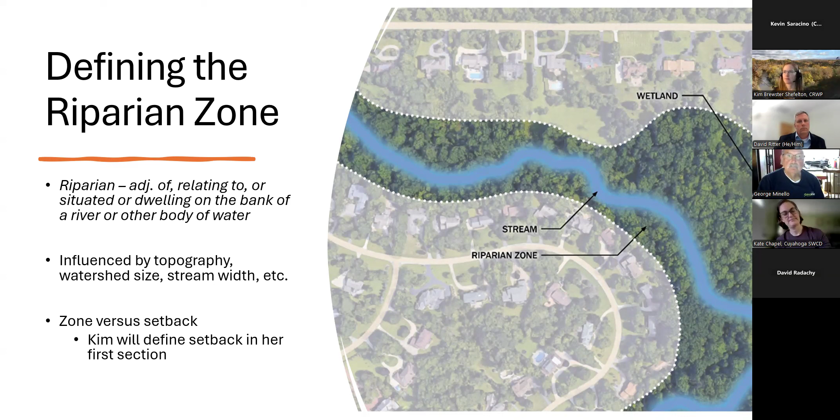All right, so other things that could be in this zone or other words we're going to be hearing. I often, when I'm working with the public, will hear folks use the terms floodplain, watershed, wetland, et cetera, sort of interchangeably. And while a lot of those things are included in the riparian zone, they're not necessarily one and the same. So if the riparian zone has wetlands nearby that are contiguous with the zone, that usually gets added to that outline, along with 100-year flood risk sorts of things and other things as well.

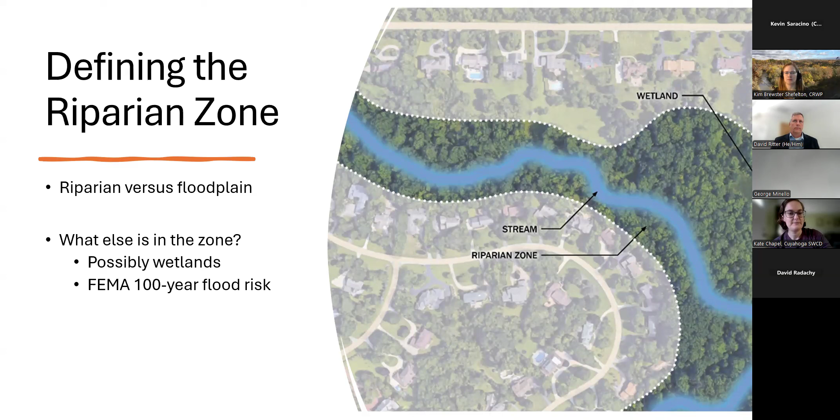This is not a static place. And so the stream, the river is going to move. It's going to move either into infrastructure or not, and the riparian zone is going to move with it. So in that way, I've seen, at least in the codes around Cuyahoga County that I'm familiar with, there's often a reference to the Soil and Water District as a resource to help folks determine where this zone is or

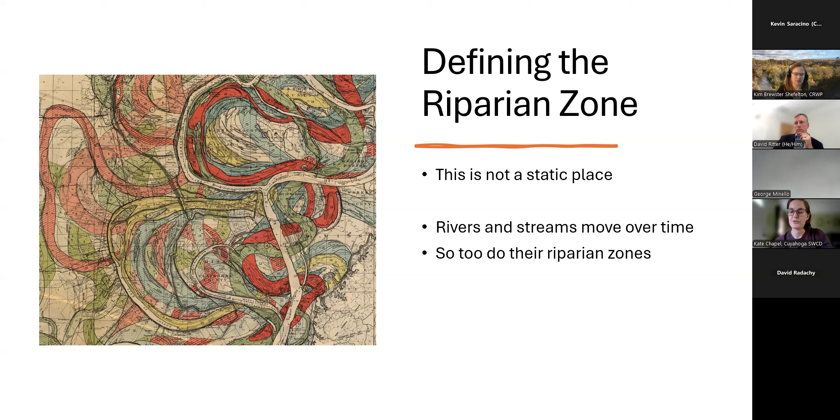where the setback is. And a lot of that I encourage you to do, even if you have a riparian setback map or a riparian zone map, because those things may have changed over time. And it's always a good idea to ground truth some of those things as you're in the process of development or working around the stream. All right, next slide.

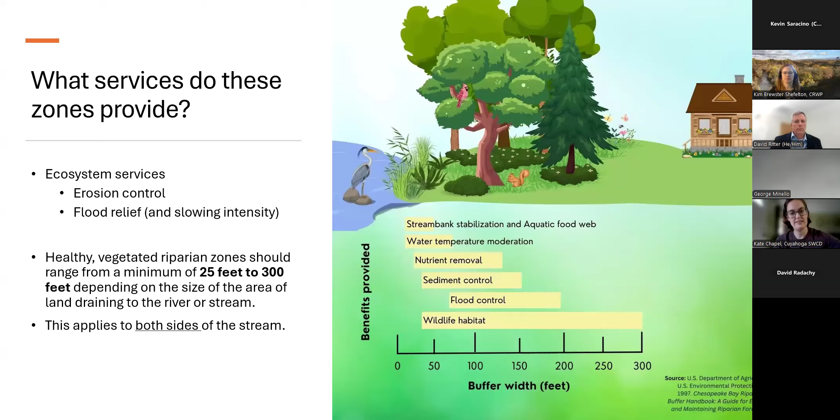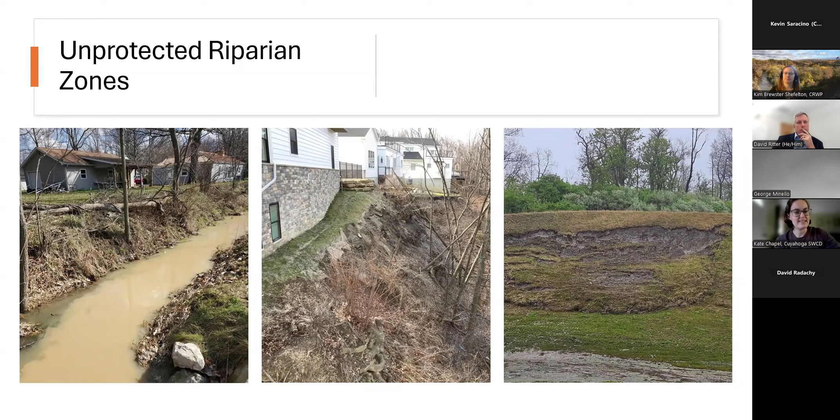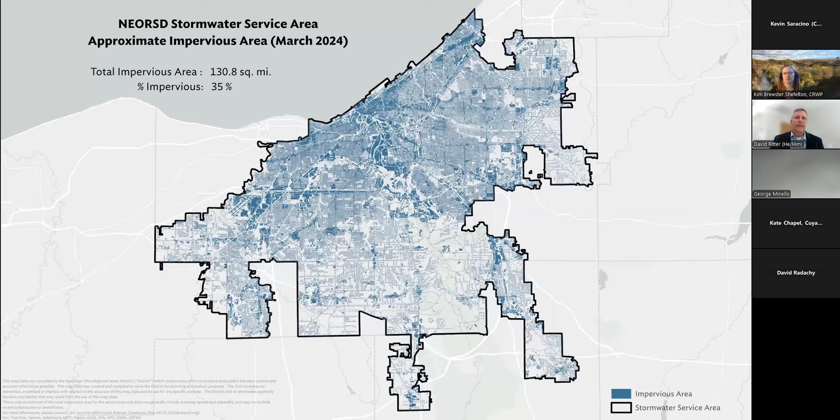It also leads to maintenance issues because there's a lack of access to these channels because of private development. It makes it very hard to go in and do any sort of repairs just because there's so many encroachments along the stream. And also that natural stream migration is arrested in a lot of places by hard armoring, just because they're trying to protect those assets along the stream channel. So the preservation of riparian areas and those ecosystem services allows the stream to adjust and move without impacting assets. Next slide, please.

So I did a quick Google search to look at some studies to kind of determine what the economic benefits are related to the conservation of natural riparian areas. The one study, the economic value of riparian buffers in the Delaware, determined that buffers provide over $10,000 per acre per year in ecosystem and other related community benefits. The study also stated that in the Puget Sound watershed, restoration projects cost at least 10 times more than the conservation of that area or the conservation projects within that watershed.

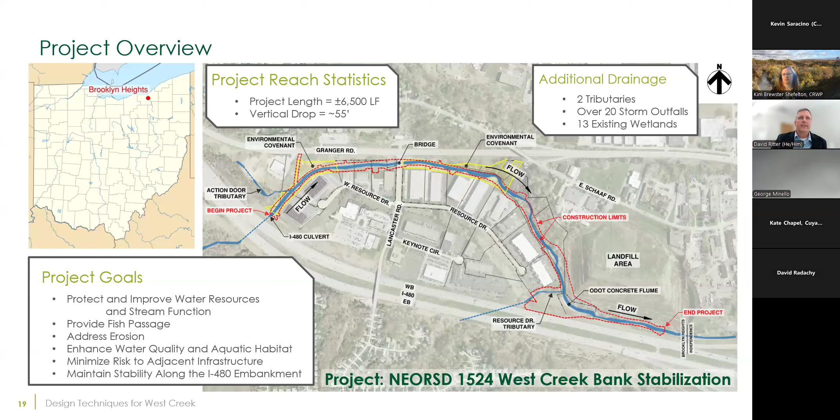The project goals include trying to bring back some of those lost ecosystem services into the project reach and also to protect the adjacent infrastructure. Next slide. Next slide, please.

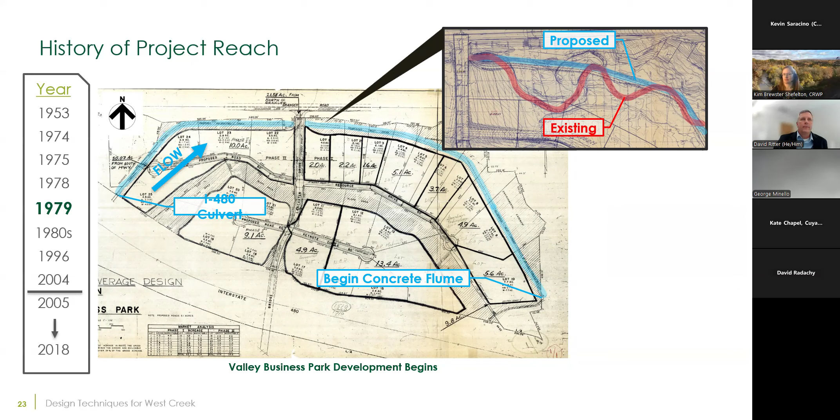By the late 80s, the conversion of the natural channel to more of a conveyance channel was complete. So Granger Road was constructed on the north side of the valley and kind of encroached those valley walls. I-480 was constructed to the south. West Creek was straightened and culverted to get underneath I-480 and also to make the right angle bend there at the downstream end of the project.

A flume was constructed. Lancaster Road was built across West Creek to serve a subdivision south of I-480 there. And the business park was nearing completion in the late 80s. And that was really kind of the nail in the coffin for this section of West Creek as it pushed that stream right up against that North Valley Wall. And also there's a little landfill there to the east end of our project, which also further constricted that stream channel. Next slide.

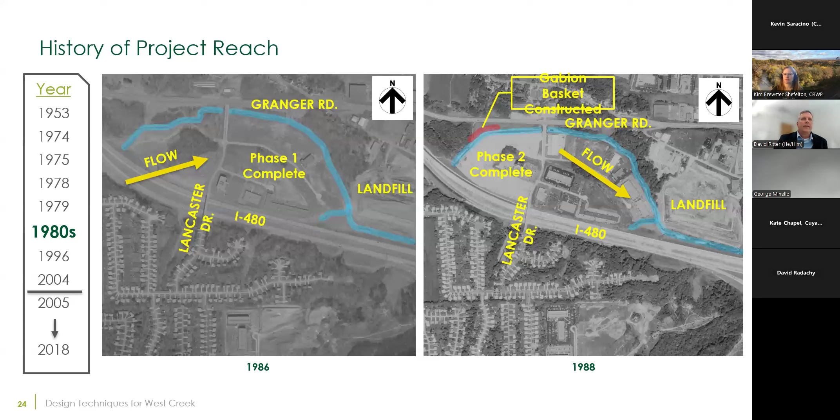So by constricting and straightening the channel, severe erosion began soon after the relocation as the stream attempted to adjust to the new flow conditions. In addition, upstream development was occurring and unmitigated stormwater flow coming from the new development led to more volume and higher velocities within the channel. And the combined effect was an unraveling of the bed and banks of West Creek through the project reach.

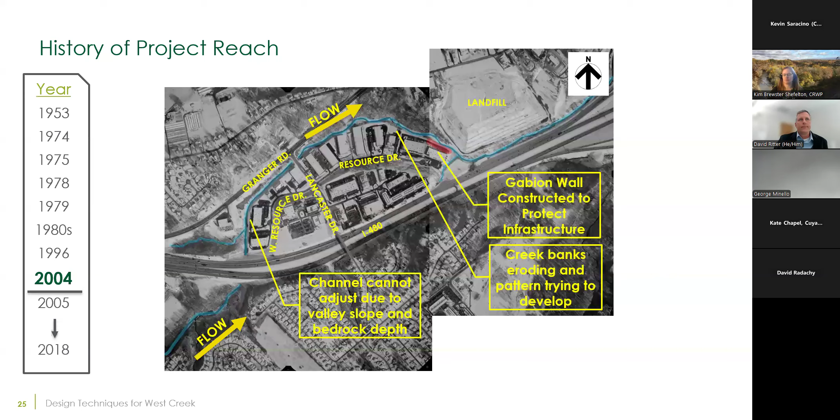During the 2000s, there were repeated attempts to stabilize the stream, but limited funding and extreme flow conditions ultimately led to the failure of some of those restoration practices, which brings us to our most recent project. Next slide. Next slide, please.

So the following photos show evidence of downcutting and lateral erosion that threatens infrastructure and washed away in-stream habitat, making it difficult for fish migration. District studies showed a 50% reduction in the number of species above the project reach as compared to below the project. Next slide.

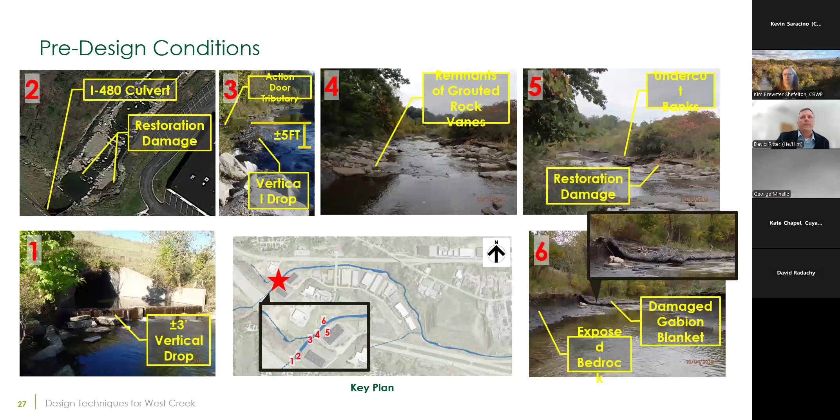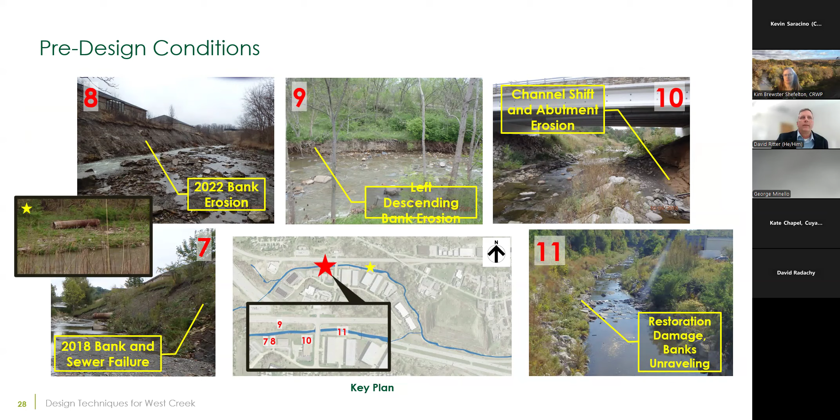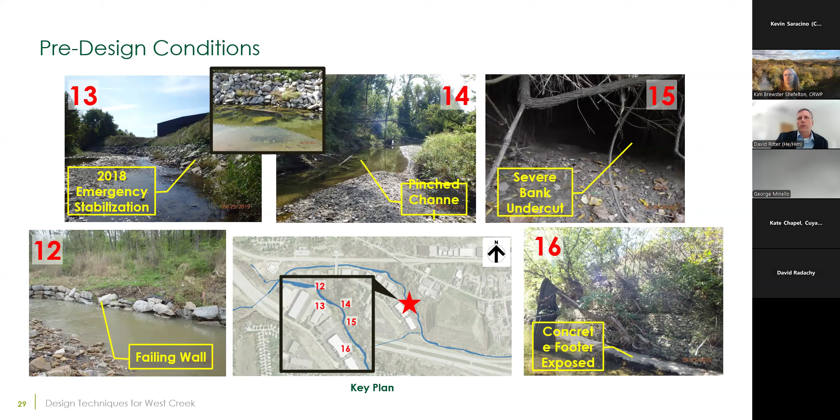Stormwater outfalls and general bank failures occurred, again, due to this bank erosion as that stream channel is trying to adjust to its new flow regime. Next slide. Emergency projects were needed to protect infrastructure, and the previously installed erosion control practices were beginning to fail as well. So again, this channel is just showing more and more signs of unraveling. Next slide.

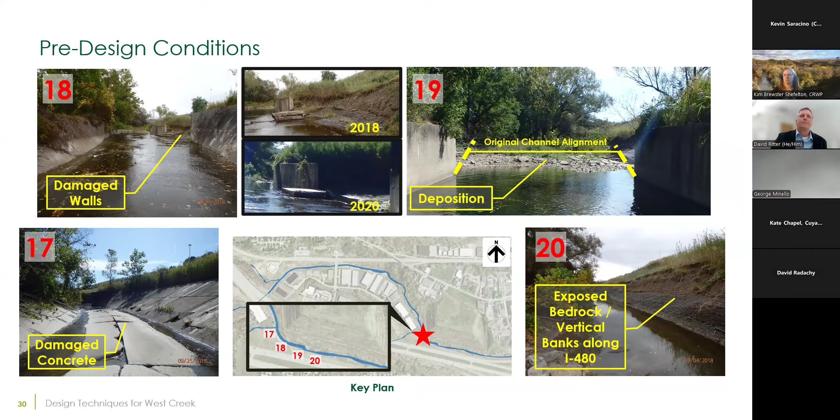These are some photos of the ODOT flume, which protects the I-480 embankment and had reached the end of its useful life and was also failing. So again, this shows a stream system that's out of equilibrium and continuing to try to adjust to its new conditions after 30 years of channel modifications and encroachments. Next slide. All right, we'll jump to the next slide, please.

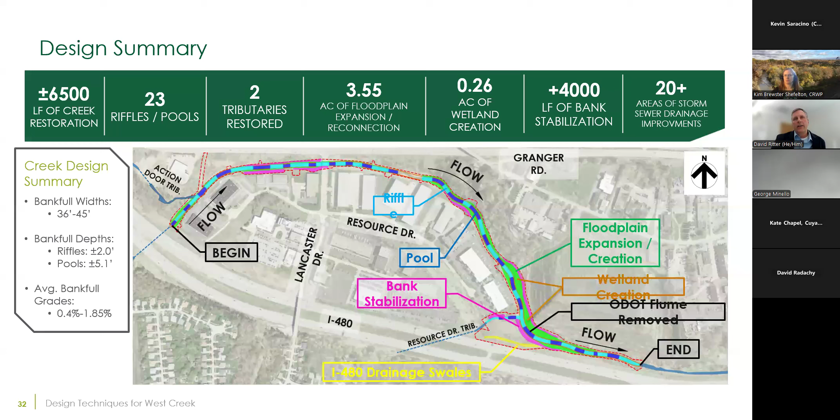So the current district project utilized a raised grade approach by filling in the channel and bringing that channel bottom up between 1 and 6 feet, allowing for fish passage and widening of the flood prone width to attempt to reduce velocities through this section of West Creek. And while the flood prone area was expanded during the project, there just isn't enough room to make a substantial difference during large events, and the reach has to be resistive to the 100-year flow volumes and velocities since it's so constrained within that new channel. Next slide.

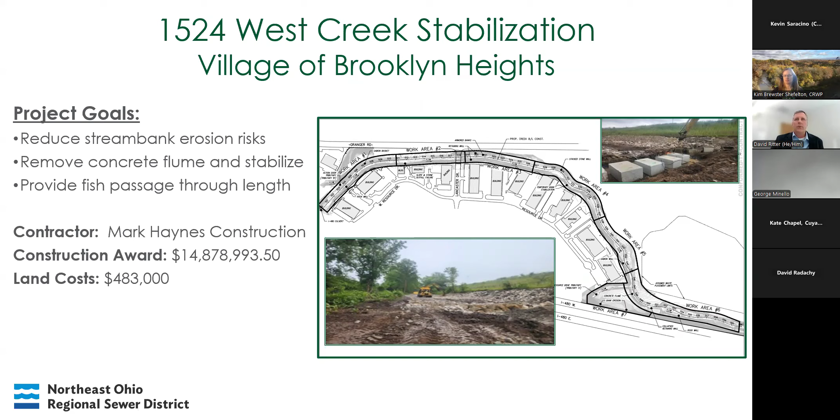While the final figures are still being calculated, the project design costs were about $2 million. Land acquisition costs for easements were around $500,000, and the construction costs will be around $14 million by the time this project is done. So there's definitely some economic impacts going back into a reach like this and trying to restore that section and provide stabilization and erosion control. Next slide.

So if we flip back to the earlier slide, I wanted to run some numbers on this project just to get a sense of the overall cost to the Northeast Ohio community. Next slide, please.

First, I took a look at conservation versus restoration. Thinking back to the Puget Sound study, which found restoration costs were at least 10 times the amount that conservation projects cost. I went back in time to look at land values of a similar piece of property, a floodplain along the Cuyahoga, and what it would have taken to preserve the corridor.

The oldest valuation in the auditor's database was from 1996, but even using those numbers, I calculated 45 acres of riparian area. So that was the length of the project times a 300-foot width buffer. To preserve that in 1996 dollars would have been about $600,000. So using the current project cost, the restoration was close to 26 times the cost of conservation. And again, without fully realizing all of the lost ecosystem services.

Next, I used the Delaware River study value of $10,000 per acre per year of lost ecosystem services. And using 1975 as a starting point, when the stream first began to be impacted, the region experienced over $22 million in lost services based on the Delaware study. Next slide, please.

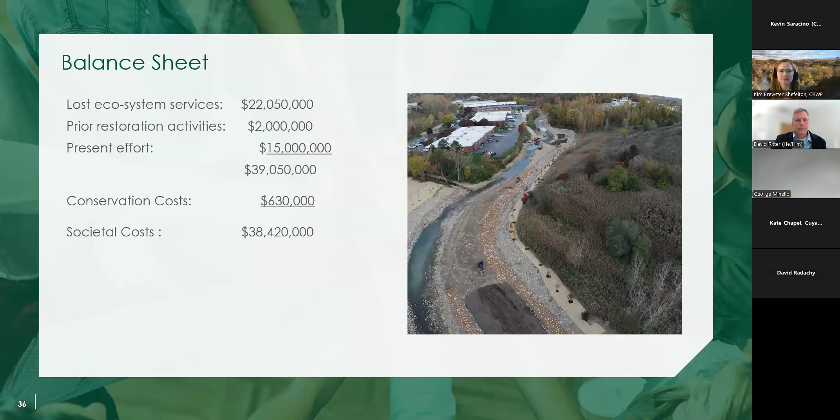My name is Kim Brewster Shefelton. I work with Chagrin River Watershed Partners, and I'm just going to give a high-level overview of riparian and wetland setbacks and how they work. Again, most of the communities represented here today already have setbacks on the books, so this is just a refresher on what these are, how they generally work for communities across Ohio.

And taking another quick step back into zoning itself, as many of us know, zoning is the way a local government controls the physical development of land and the uses of property. Zoning is designed to protect the welfare of a community by allowing desired development in appropriate locations and prohibiting undesirable development in other locations. Zoning is really a way for a community to implement its comprehensive plan.

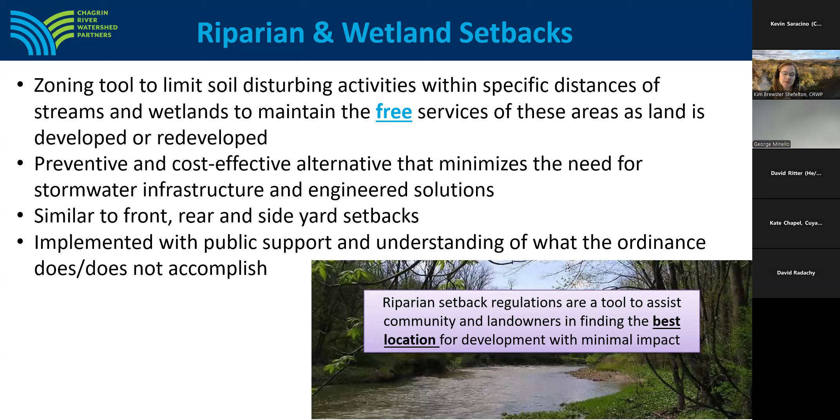So riparian setbacks are a zoning tool that communities can use that help maintain those free riparian functions that Kate and Dave described as communities are growing and as land is developed or redeveloped. So riparian setbacks control the location of soil disturbing activities within the riparian zone, and they're really similar to front and side yard setbacks that can be flexed with other setbacks to allow the riparian setback to be maintained without making lots unbuildable. Riparian setbacks are not intended to prevent development, but really to find the best location for development on a particular property.

So Chagrin River Watershed Partners has developed a model riparian setback code that can be tailored and adopted by communities that wish to maintain those free benefits that are provided by healthy riparian areas. Our model code does establish a minimum setback width that controls the location of soil disturbance on a parcel. The minimum setback widths in our model code range from 25 to 300 feet on both sides of a watercourse, depending on the watercourse drainage area. Our model code also extends the setback to include wetlands and the FEMA designated 100-year floodplain.

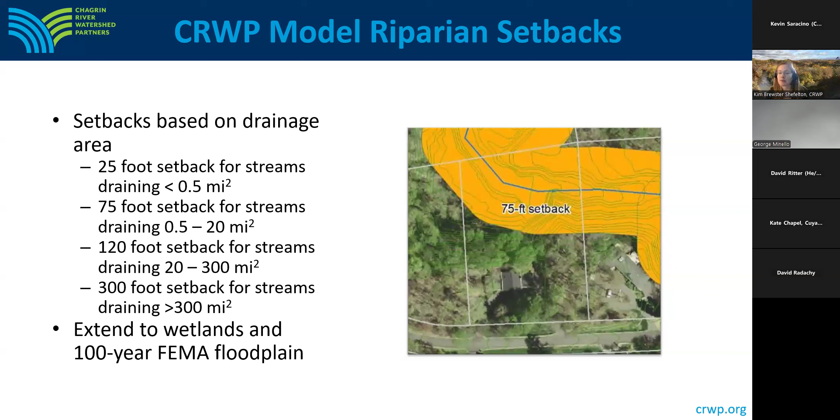So specific setback requirements really vary by community, so your community's requirements might look different. Pamela Davis of NOACA is going to be discussing variations in code requirements across communities in the Northeast Ohio region a little bit later.

In addition to riparian wetlands, isolated wetlands also provide a lot of benefits for stormwater management. So we also have a model wetland setback code, which requires areas around wetlands to be preserved in their natural state. The wetland category is determined by Ohio EPA's wetland quality assessment methods, with Category 2 wetlands being your moderate quality wetlands, and Category 3 wetlands being your highest quality wetlands, having different setback widths.

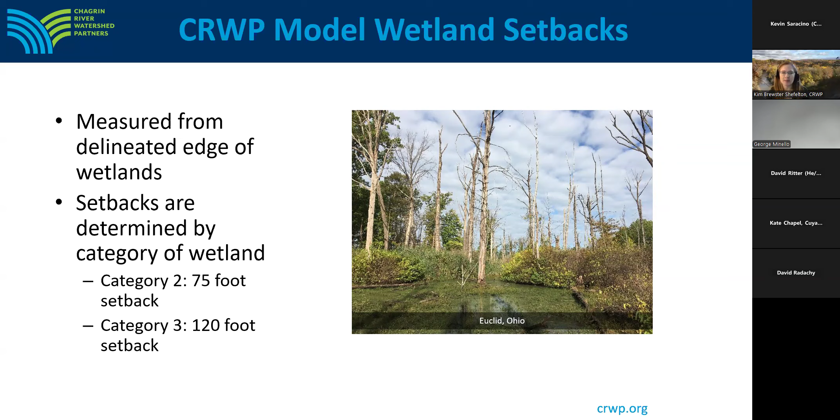If you're interested in taking a deep dive into how we developed our model code widths, you can check out a document on our website. There's a link there to point you to that to take a little deeper dive into that.

So in terms of determining the presence and extent of setbacks in the field, again, the setback requirements vary by community. In CRWP's model code for small streams that drain less than half a square mile, setbacks apply when there is a defined bed and bank. So defined stream bed, that's typically an area that's free of vegetation due to flowing water. It's defined by rock and sediments of varying sizes, all the way from big boulders to small particles like sand and silt.

And setbacks in our model code are measured outward from the ordinary high water mark. That's the point of the bank or shore where the presence and action of surface water is so continuous that it leaves a district that's marked by erosion, destruction or prevention of woody terrestrial vegetation, predominance of aquatic vegetation, or other easily recognized characteristics. And so that ordinary high water mark really defines the bed of the water course.

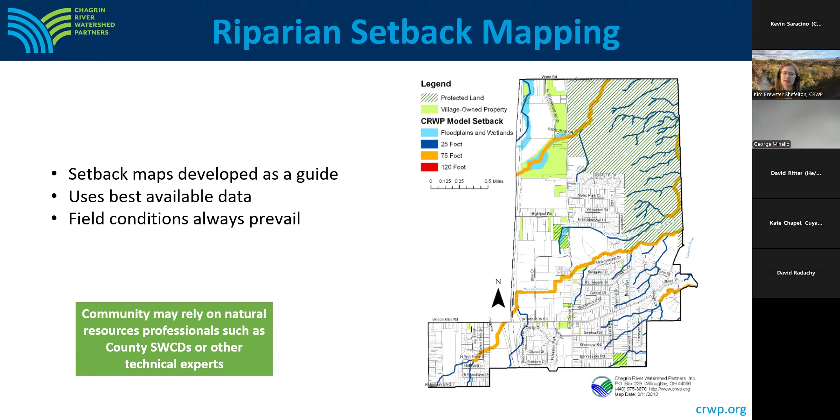Typically, developers are required to delineate setback widths and water bodies when they're submitting their development plans to a community. It is not the responsibility of the community to delineate setbacks for every property when adopting a riparian setback code. And communities can really rely on other natural resource professionals that are available to them, such as your county soil and water conservation districts, local watershed organizations, or other types of technical experts.

So in terms of permitted and prohibited uses, CRWP's model riparian setback ordinance describes permitted uses within the riparian setback, also conditional uses or activities that are allowed with a permit, and then also activities that are prohibited in the setback area unless a variance is granted. So your community's code may vary from this list. I'm just showing this list as an example.

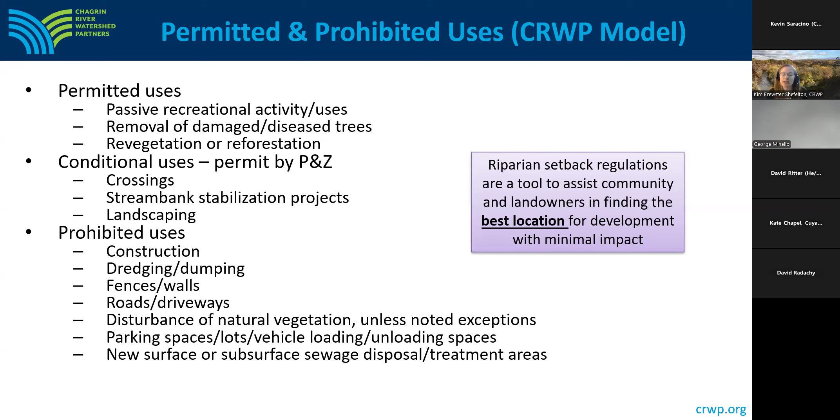So typically, prohibited uses would be subject to the zoning process, meaning that if someone has a project where a prohibited use is proposed in the riparian setback area, they'll be able to come into the Planning and Zoning Commission or the BZA to discuss their request, ask for a variance, and look at other potential options. Again, the goal would be to identify the best possible project with minimum impact to that riparian area.

In most communities' codes, structures that are already located within the setback at the time of adoption of that code are grandfathered in. So typically those structures can be maintained or repaired, but should not be changed or enlarged. And the community's existing regulations regarding non-conforming structures and variances apply. So I encourage you to refer to that section of your code.

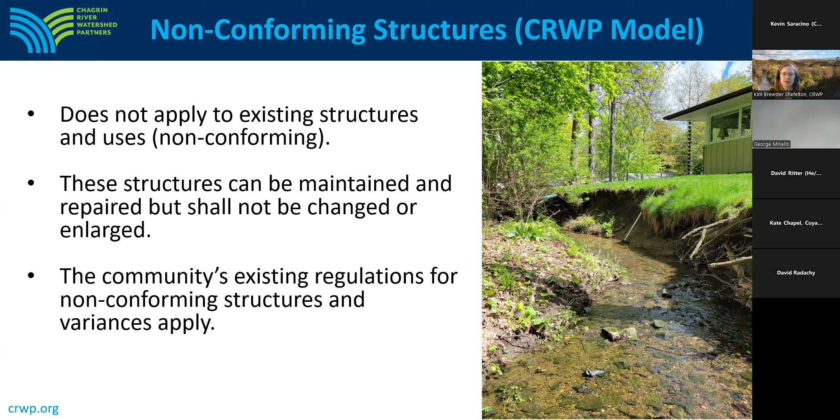We've had this question come up, so I added it here. Do non-conforming structures remain non-conforming if the property changes ownership? Thought that was an interesting question. It is our understanding that non-conforming structures do not lose that status due to change in property ownership alone, but again, refer to your individual community regulations about non-conforming structures and variances.

So what is the purpose of the variance as a zoning tool? We're going to revisit this in our second hour of our workshop in terms of how to handle variance requests, but just in terms of an overview here, variances or exceptions for prohibited uses within the setback may be granted by the community if they decide that the application of the zoning regulation would result in a practical difficulty or an unnecessary hardship due to the unique characteristics of the property that differentiate it from other properties in that zoning district.

So zoning codes, they're an excellent and cost-effective tool for protecting healthy riparian zones and all the free services that they provide to a community. However, they are imperfect tools, and no zoning code can anticipate all future development circumstances.

So variances are really essential to the proper functioning and administration of a zoning code. There are two different types of variances that relate to riparian and wetland setbacks. The use variance being exceptions for the use of a property that is not normally permitted in a specific zoning district. For use variances, you must demonstrate that denial of that variance would result in unnecessary hardship that is not self-imposed by that landowner or the applicant. And these are usually pretty rare variances, and they may not be allowed in all communities and all community types. So just something to note there.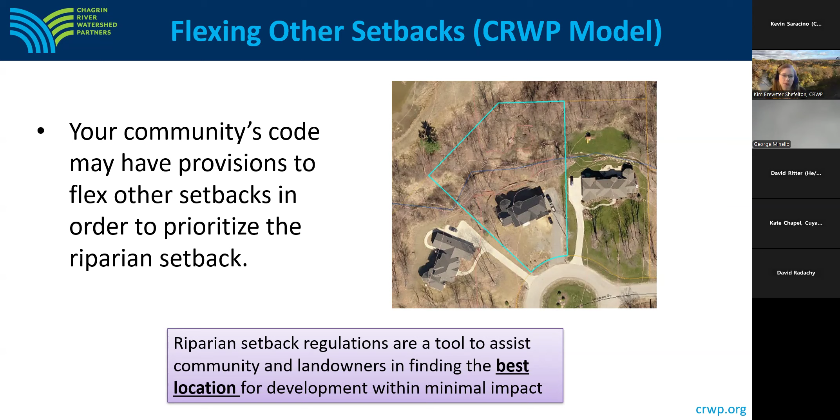So in terms of flexing other setbacks, our model has provisions for providing variances to other setbacks, such as side yard, front, rear setbacks, and so forth, to really make sure that lots can remain buildable while also maintaining the riparian setback. Again, the idea here would not be to prevent development, but to find the best location for development on that property. So the photo here is depicting a property in a community with riparian setbacks where a variance was granted to reduce the front yard setback from 100 feet to 70 feet in order to maintain the riparian setback in the rear of the property. So that's an example of other setbacks being flexed to really uphold that full riparian setback width.

So riparian setbacks are an important local zoning tool because they help maintain the free services of riparian areas that we discussed earlier. They also lower costs to residents and communities by keeping homes and infrastructure and other property out of the path of ever-changing streams without decreasing property values too. Riparian setbacks are also a best management practice recommended by Ohio EPA and other agencies. And then finally, protection of riparian areas really only occurs at the local level. So state and federal agencies regulate activities within the stream channel itself, but these agencies are not responsible for maintaining the function of riparian areas. So that protection really occurs at that local level.

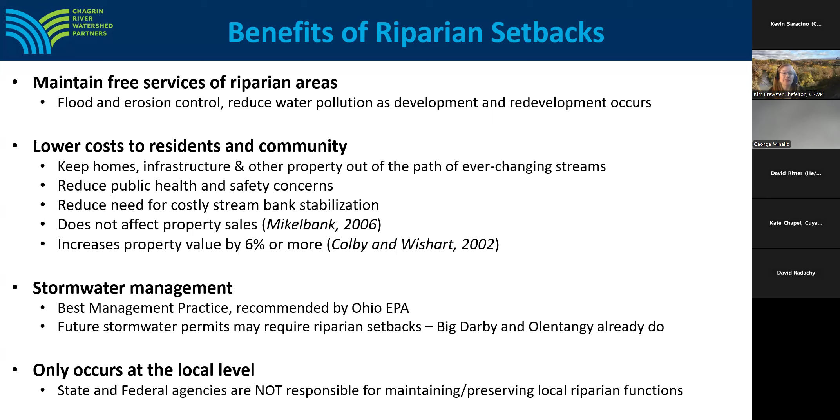So we're focusing on riparian and wetland setback codes today, but there are other natural resource protections your community might consider adopting into your local codes. The decisions about development are really based on the local government level in Ohio. So local governments determine where development happens, how stormwater management happens, how protection of streams and wetlands and other resources like historic resources or scenic resources, how those protections happen. And so CRWP has developed a suite of model codes or code language that helps our member communities protect watersheds as those communities are growing. So these are available on our website, and we're happy to discuss any and all of those codes with you in more detail if you're interested.

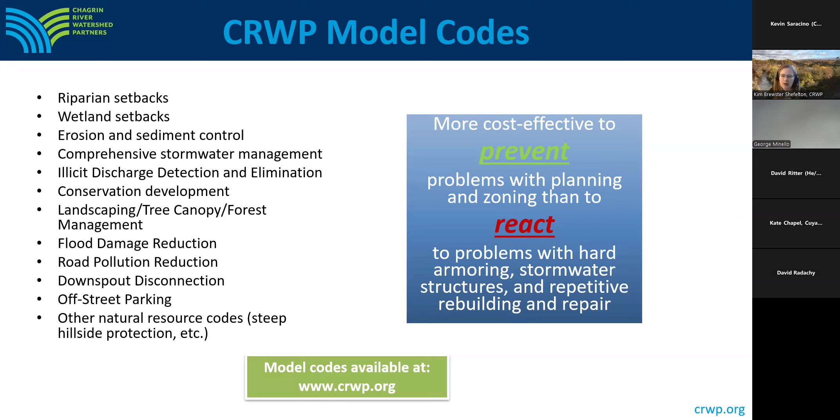And as just one example of one of these other codes, we do have a model code for conservation development, which is another type of zoning tool that allows residential or even commercial development while still protecting the area's environmental features, really allowing for more open space and protecting farmland and protecting that rural character of communities.

In a nutshell, conservation developments usually site homes on smaller lots, and there's less emphasis on minimum lot size. However, the total number of homes or density on a given acreage does not necessarily increase over that which would be allowed in traditional subdivision designs. So the same number of homes is clustered on a smaller portion of the total available land.

The remaining land, which would have been allocated to individual home sites, is now converted into protected open space and shared by the residents of the subdivision and maybe even the entire community. So conservation development, again, not a focus of today's workshop, but this is just another example of a zoning tool for your community to consider. And we're glad to talk with you about it if you're interested.

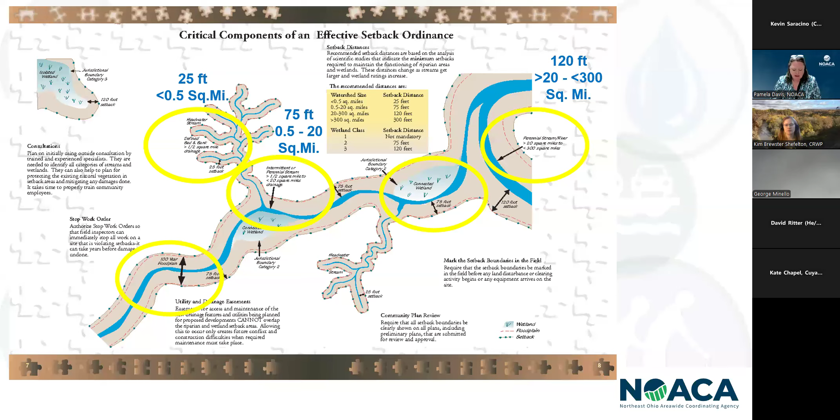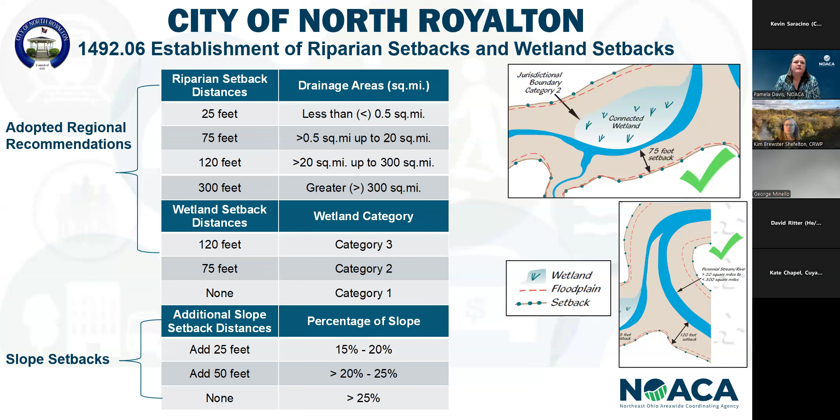One of the things I'd like to bring to your attention is that in considering variances, North Royalton actually provided some guidance to their Board of Zoning Appeals regarding variance requests. They encouraged the BZA to really consider, is there going to be a loss of riparian or wetland function associated with the variance? And they further define that function as flood control, soil erosion control, sediment control, and other water quality protection. They also encourage the BZA to think about soil types and the existence of natural vegetation, especially within that 100-year floodplain.

In addition, they allowed the BZA to vary the front, rear, and side yard setbacks before they vary the riparian or wetland setbacks. And they actually said no variances for asphalt or concrete paving when porous or gravel pavement can work. Next slide, please.

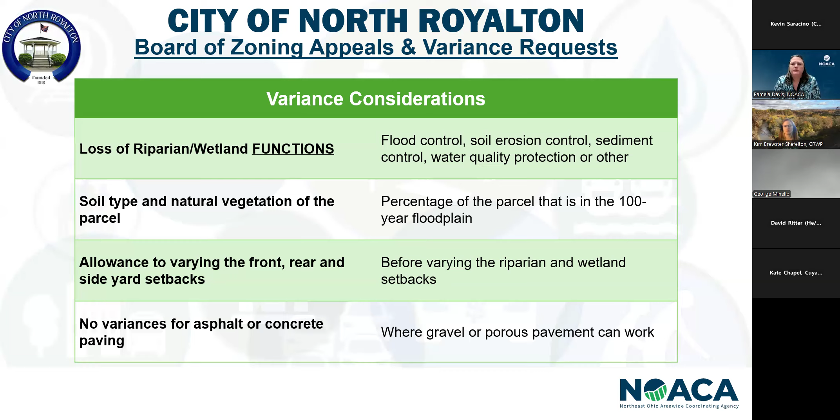So when we think about this loss of function, the regulations North Royalton adopted identify, when there is a loss of function, what type of mitigation has to happen. When there's increased flooding or streambank erosion or sedimentation, mitigation is required at the site or upstream from the site within the same watershed. If biological functions are lost, again, the priority for mitigation is upstream whenever possible, then downstream if upstream is not possible, and last, it can happen anywhere in the community.

Again, if there's a loss of the riparian or wetland setback, 100% of the amount of setback loss has to be mitigated. So if the variance says you can have this variance of 20 feet of the riparian setback, they're going to have to mitigate that at 100%. And if they actually lose any wetlands, they have to be replaced upstream of the disturbed location, at a rate of 100%. Next slide, please.

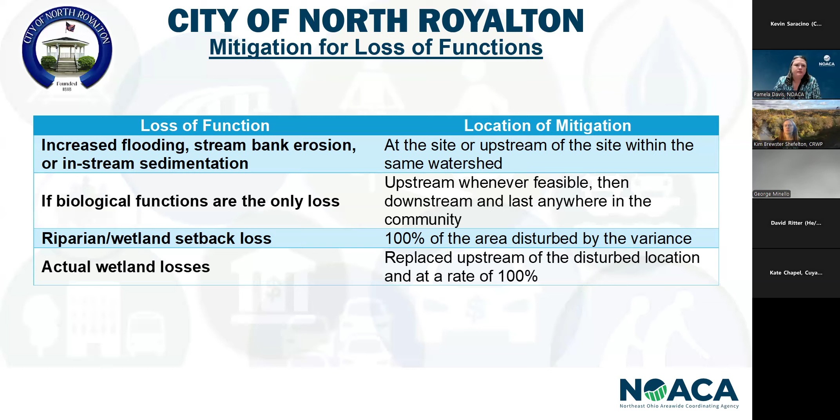So some other community examples. City of Warrensville Heights added 15 feet of additional setback for steep slopes from 15 to 20% and 25 for slopes greater than 20%. City of Painesville looked at their drainage areas and set 6 different setback distances for the size of their drainage areas. They also adopted a 10-foot setback for Category 1 wetlands. You've heard Kim talk about Chagrin River Watershed Partners model regulations. Auburn, Bainbridge, and Russell Townships all adopted those model codes. Next slide, please.

City of Avon, in their riparian establishment, talks about designated water courses within the French Creek watershed. They require 50 feet on each side of French Creek, Mills Creek, and Schwartz Creek, and 25 feet in all the other water courses within the French Creek watershed. Many of you may remember that in the early phase 2 regulations, French Creek watershed was a rapidly developing watershed.

City of Wadsworth requires the width of riparian zones to be 10 times the width of the water course. They reference and use the formula included in the Ohio Department of Natural Resources Rainwater and Land Development Manual. The idea is that they take the most current formula from ODNR and incorporate it into their engineering rules and regulations. Next slide, please.

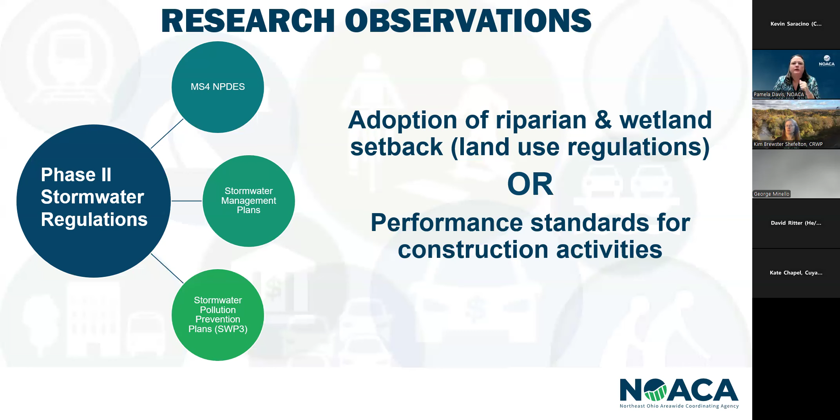In reading these codes, you can see that as the Supreme Court moved back and forth with the definition of the waters of the United States, development codes and their adoption were kind of influenced by those changing definitions. Some communities realized that the feds were going to go back and forth, and they just said, okay, we'll have setbacks for surface waters of the state, because the state was actually adopting their own regulations

at the time. I think the biggest takeaway in my research observations: when we think about planning, we think about the 10th Amendment and communities' ability to use police power in developing regulations to protect the public health, safety, and general welfare. And I think a lot of the language was kind of missing that focus on, not only are we protecting the value of the riparian area, as Dave Ritter already said, we're protecting the financial economic impacts to the community.

Next slide, please. So we're presenting our draft findings. We are working on developing a report. You can find the brochure, the community guidance brochure, and the 2012 review on our webpage. If you're interested in being a peer reviewer for our final document, please contact us. We will be working on that report post-presentation. If there are any mistakes, they're mine. Please let me know. And next slide, please.

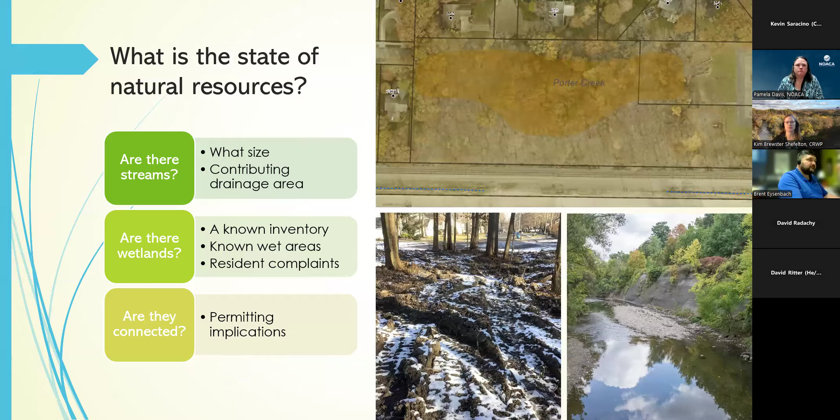This one's pretty straightforward. You'd think gathering the review resources, there's checklists out there. The Ohio EPA, when you're reviewing a stormwater pollution prevention plan, which seems to be where a lot of this riparian and wetland investigation comes into play, requires a checklist now that demonstrates that the community is not just haphazardly stumbling through a review, but is doing it in a systematic method.

Technical publications that are out there, permits. As Pam mentioned, the definition of waters of the state has been a moving target for about 10 years, and it'll probably continue to be a moving target for a while. And that includes both federal waters and state waters or isolated wetland permits. It keeps changing, and as a reviewer, you need to change along with that and be up to date. Ordinances, knowing which ordinances within your community relate to the various projects that you're working on.

Back to the elected officials and the economic development officials, have there been any community-specific agreements that were put in place as a part of this development, whether it's a mitigation or an enhancement of the riparian zones or a trade-off of space from one area to another? So like offsite mitigation, for example.

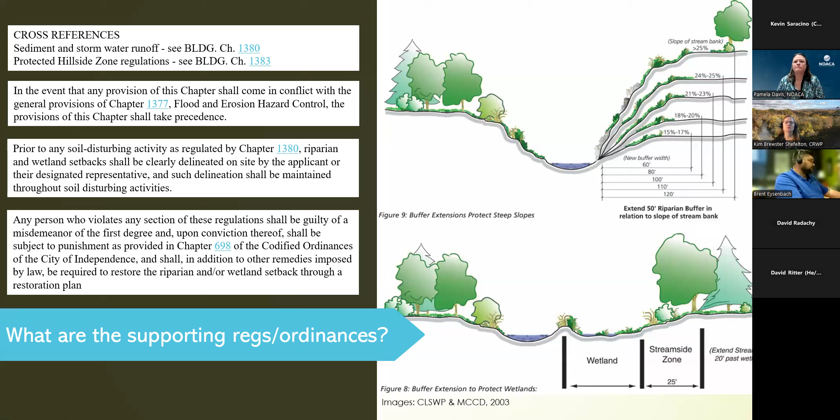Are there viable alternatives? This isn't, again, a discussion about conservation development, which could be a workshop all unto itself. But oftentimes the zoning code, which regulates the frontage, the lot depth, and so forth, can be at odds with the riparian and wetland zones codes. And so it's understanding before a project comes before your community what are the values of that community. Is the value maintaining a particular frontage and a particular aesthetic to the neighborhood, or is the value of the community maintaining the natural resources of the area?

I can tell you that a few years ago, there was a community in which a large parcel had come onto the market that had not previously been on the market for quite a while. So it wasn't really on anybody's running estimate or their radar. And it was chock full of wetlands, and it looked like it was going to be a pretty complicated project to develop.

During a conversation with the city engineer, I'd asked about whether they considered conservation development, and this engineer was adamant that that's not the type of look that they wanted for their community. So that's the value judgment, if you will, of that community.

Slide, please. Is the project constructible and is the project livable? And I'll spend a little bit of time on these photos. The top two photos are essentially looking at the same parcel, looking at the same building, if you will. This was a project in a community where there was a large wooded parcel and streams running through it and associated wetlands. And the community was wanting this residential subdivision to happen.

The regulations that were in place within that community would have meant that the developer needed to lose a couple of buildable lots in order to adhere to all the project setbacks. And the developer said that that would not support the margins for their development. So they got into a bit of a negotiation with the community. The community asked for our help.

And in terms of looking at that, we determined that there was probably some wiggle room here and there to massage those riparian buffer boundaries with the implementation of on-site mitigation. So reforestation of the riparian buffers that were to remain and the wetlands that were to remain. It was a very good project in the sense that it happened early. There was a very transparent conversation and negotiation, and then everything was pretty well documented before the plat was ever signed.

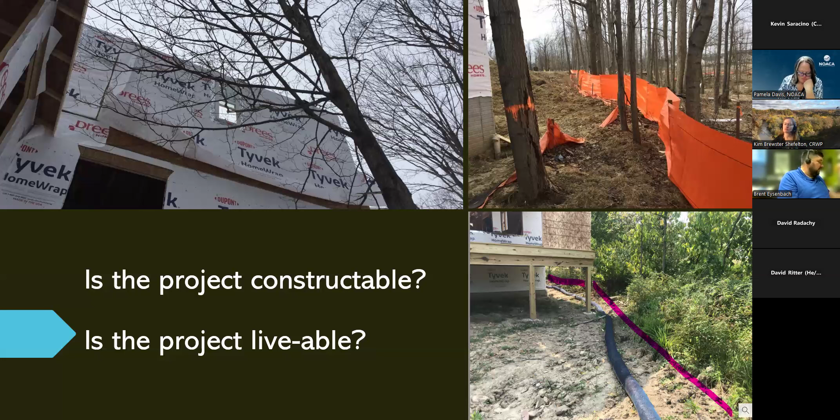This lower right photo is not the same home, but it demonstrates the same concept here: is this house livable? If that red line, which is the buffer line, is supposed to be the kind of no-go zone for the homeowner, can that homeowner effectively live with that? Or has the real estate agent properly identified that to them? Or will this now become a hassle and a headache for the community moving forward, having to deal with complaints and encroachments? Slide.

So in this circumstance, a community that didn't really think that they had steep slopes, that wouldn't have envisioned themselves as being a community with steep slopes or needing to have a steep slope ordinance associated with their riparian and wetland setbacks, does truly indeed have steep slopes because of the erosion from higher storm events and more impervious surface over time eroding this channel down in the method that it is. So thinking about preservation, variance, and mitigation as we move forward here.

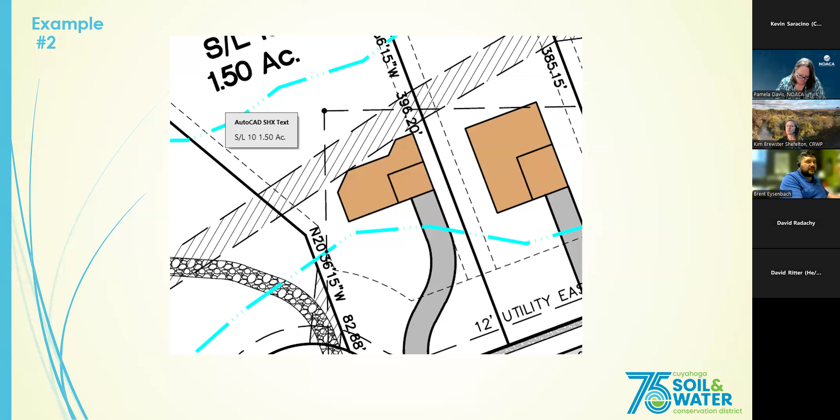And a final example, this is fairly straightforward, this is more of a wetland issue. You can see here that there's an existing wetland that was mitigated and a riparian setback that was associated with that. So at what point then, when a wetland gets mitigated, does the setback for that get extinguished within the code? And then the riparian zone, which did not get mitigated, then takes supremacy. So it's understanding the layers that are associated with these riparian and wetland mitigations.

And in some communities, they also have buffers to those riparian setbacks. So it might be a 25-foot buffer on a 75-foot setback for a whole 100 feet of space. And if some or part of that gets mitigated, how does that buffer and how does that setback shrink? In this case, it's a 3,200 square foot variance that was granted to these property owners that had cut through there. The slide.

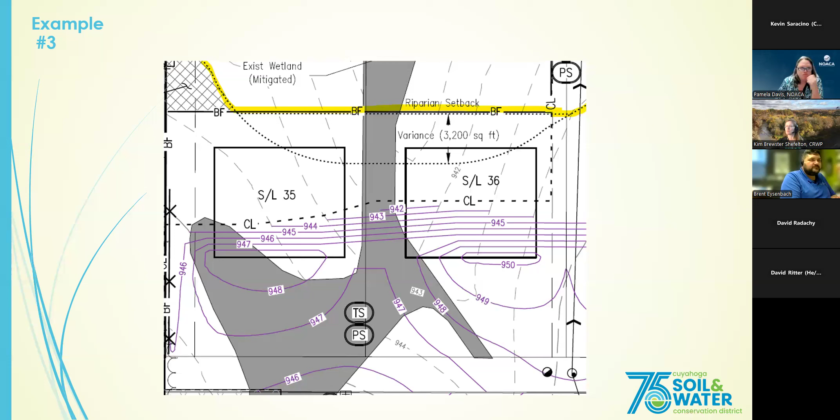And this is what the project looks like after it was built. And so again, it's talking about livable space here. To any ordinary homeowner standing on that deck and they look back, what do they think is their parcel boundary? And do they have natural resources or setbacks or exclusionary zones on their property? And how will the property owners be informed of that? Is it going to be a deed restriction on their parcel? Is there going to be a conservation easement put on it? Is it going to be a drainage easement of some sort?

But at any rate, we oftentimes find at Cuyahoga Soil and Water that on projects like this, people will continue to encroach into this remaining setback area in order to eke out another mower's width of grass, and then another one the next season, and another one the next season, and then they build their fire pit, and pretty soon they're sitting right on top of the natural resources, the wetland area or the riparian zone here, because none of it gets followed up. Slide, please.

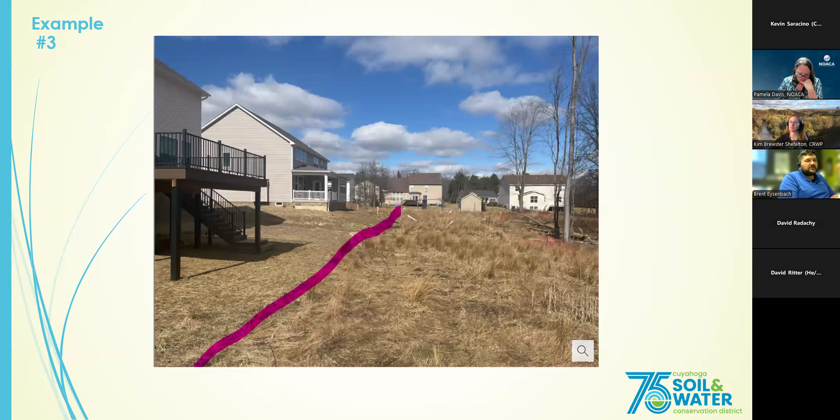Which brings me to the point to follow up. Back to the project here with the was it constructible? In the upper left-hand corner, I already told you about these two trees and the developer trying to move the silt fence around there. That's a follow-up item. So after the original negotiation, after the subsequent negotiation, you still have to go back and make sure that the agreed upon boundaries are being enforced.

In the upper right-hand corner, we talked about needing to replace a certain number of caliper inches of trees for that one that was removed, in addition to the wetland and riparian setback enhancement for the general variance mitigation that was being provided on this project. Are those trees being planted? Just physically counting up the number and making sure that it's getting done.

In the lower left-hand corner, though, it goes beyond just counting up tree tubes, and it means going out and actually looking at these. In this lower left-hand case, what we're seeing here is that more than 50% of the tree tubes that were planted on this project were rotten and they needed to be replaced again. So not only doing that follow-up, but also making sure that in whatever sort of variance or mitigation agreements are put into place, there's performance measures and perhaps performance bonds associated with that.

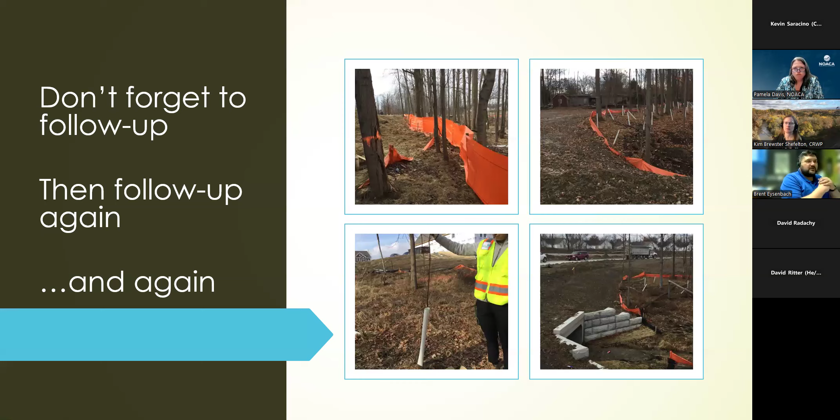So it's written here, but I think it's worth saying, don't forget to follow up and then follow up again and then follow up again and then follow up again. Slide, please. So that concludes my portion of it, and I'll send it over to David.

And we did have just a quick question there. I see the one question from Patrick. We'll reserve that for our general Q&A, but the second question there for you, Brent, for your example number one, had a question about the mitigations provided in that first example, and I'll try to go back to that slide. So the setbacks after the mitigation, this wasn't my project, so I'm not 100% familiar with it. Brent, do you want me to answer it? I absolutely do, Carla. Thank you.

Okay. So actually, the image is showing that they were mitigating for some wetlands, and so they were trying to say that they had a smaller setback for the riparian and wetland setback, because they were going to ultimately mitigate those wetlands that they were going to disturb. So the developer was trying to say, hey, this is a smaller impact than it really was.

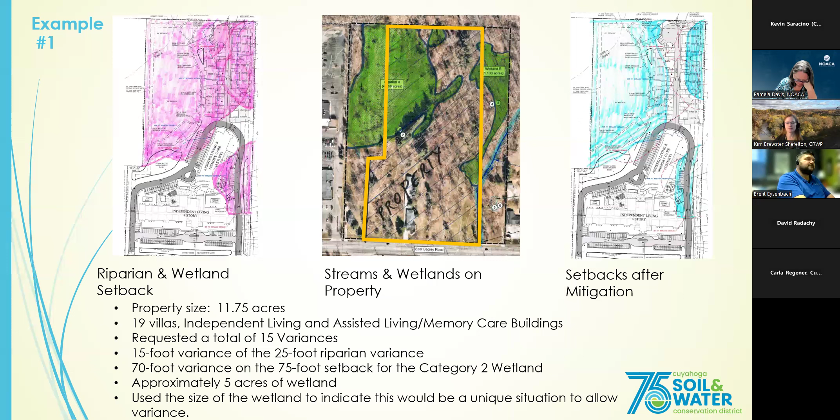So Sarah, who asked the question, definitely if you're considering mitigation in the sense of an enhancement of the riparian or wetland zones that are to remain, make sure that you absolutely get some solid performance measure language included on the plat, so that way everyone can be held accountable for that. Thank you, Brent and Carla.

Advance again. And then I'm going to hand it over to David Radachy, the Director of Lake County Planning and Community Development, to provide a little more perspective on development plan review. So take it away, David. Okay, this is not really a development review session. It's just us using riparian setbacks as a design tool as we look at our subdivisions, and especially in communities that don't have riparian setbacks in their zoning.

Most of our townships, I think all of our townships, have the riparian setbacks in them now, so it's not as much of an issue as it once was in Lake County, but it was originally a problem. This section is county and township based, so cities have greater authority than what townships and counties do. And subdivision authority and zoning authorities are usually divided in the townships.

Counties through the planning commission administer subdivisions and lot splits. And zoning in the townships is usually through the townships themselves. There are some areas that have county zoning, which is still separate from county subdivision. But in Northeast Ohio, most of the townships handle their own zoning. Slide again.

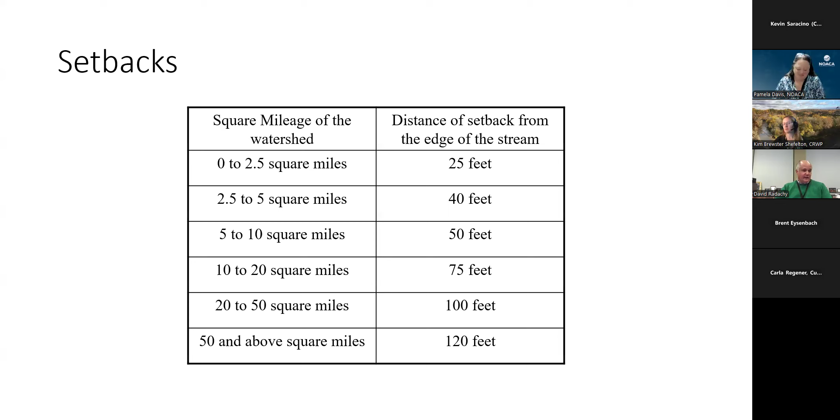So this is just an image of a regular lot with the stream in the rear line. If we use design standards correctly, we will push the streams into the backyard of the property or near the rear line of the lot. And then that will put the riparian setback into the backyard, which will be covered by the normal rear setback of a house or the side setback. And the side setback would also push it away from the house. Slide, please.

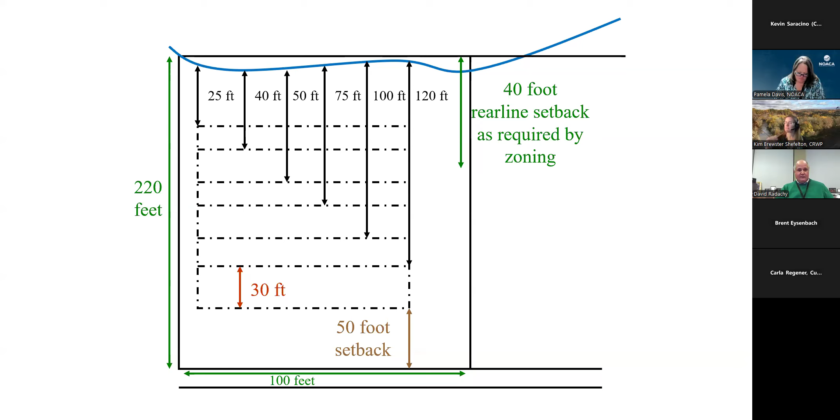The new regulation was developed to influence the subdivider to place the land adjacent to the stream in the backyards, to help keep the area clear of improvements, keep the houses away from the stream, help protect the houses, help protect the stream. Slide, please.

This regulation was designed to reduce the amount of land that was in the building envelope when the lot was adjacent to a stream and not reduce the amount of buildable land in the subdivision. This is a setback, not a buffer. The owners of the property can still use the land as they see fit. They just cannot put a house into the setback area.

We're limited to what we can do in these areas. We can do setbacks, but after the plat's been filed, we have no authority over the property owner or the subdivider or the home builder. That falls into zoning. So the riparian setback and zoning will keep that better protected than what we could. We're just trying to design the subdivisions better to make sure that the areas are at least considered as they do the development of the property, so that the riparian area protects the stream and also protects the home structures and the property.

As I said before, with some of these images that we are seeing, if we use design setbacks in the subdivision review, we are able to push houses away from the stream and help protect them. Slide, please.

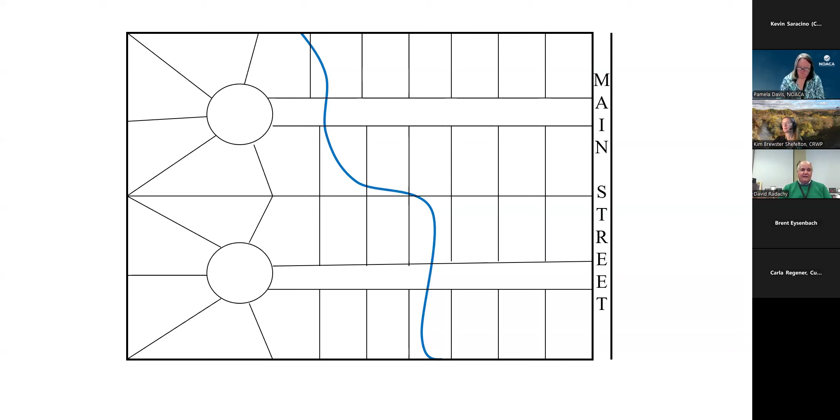So we're using riparian setbacks. Can I go to the next slide, please? We'll push that stream into the backyards of various lots, so we can have one road go across the development. And so that's one culvert for the township to maintain in the future. We do have a connection in the future for another road to the south to help continue the development.

All the lots in these pictures have the stream in the rear lines or on the side lines, so they're going to fall into the side line setback if there's no riparian setback. So it helps protect the future homeowners, even if the township doesn't have a riparian setback.

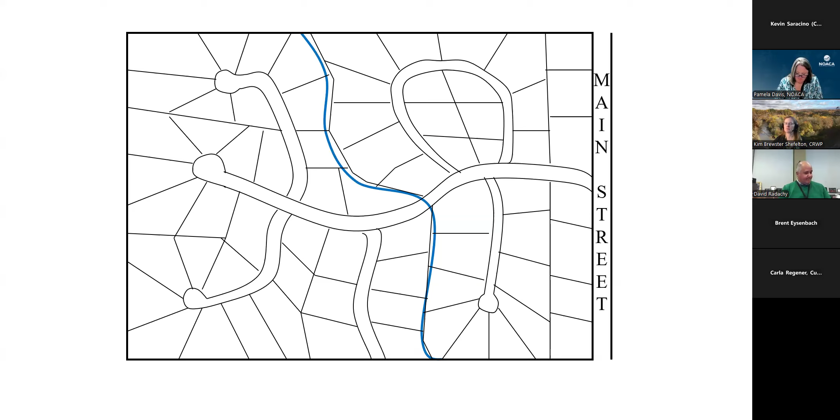Riparian: the planning commission can only influence the design of the subdivision and make recommendations to the developer on ways to keep the riparian corridor clear of improvements. After the plat's filed, we don't have any jurisdiction of the riparian setback unless the township has riparian setbacks themselves in their zoning. Zoning takes over at this point.

If there's a riparian setback, the zoning inspector will regulate the area. If there isn't a riparian setback, then the zoning inspector will enforce the regular setbacks. Subdivision and zoning are separate in the township. I'm sorry. Slide, please.

There are ways that we can also continue to protect this. We can deed-restrict it and put into the homeowner bylaws that they have to have a setback, an easement on top of the riparian setbacks. There are conservation easements that they could sell to various agencies like soil and water conservation districts, the metro parks, other land

conservation development districts. That will also help reduce the property taxes on the property, and if it's put into a conservation easement, then you have another agency who can come in and make sure that those riparian setbacks are still clear even after the development has been going forward.

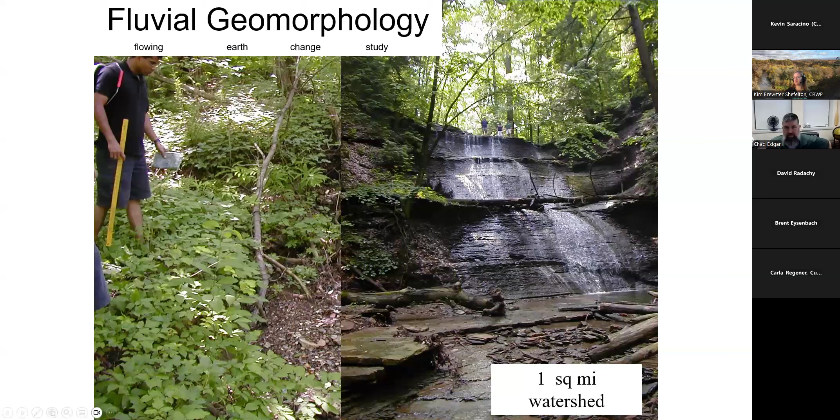Another example, 1/100th of a square mile, it's barely there. Doesn't matter if it's flowing or not, as long as it's a defined channel, defined bed and bank, alluvial substrate, very small stream. Here's a 1 square mile watershed. I just love this picture. I think it's beautiful, but you can see 3 people stand up here at the top of the waterfall. A little bit wider. We'll go up to 30 square miles, wider yet, all the way up to 267 square miles. This is the Chagrin River here, quite a bit larger channel.

So the larger the drainage area, the more water we have in the channel, which means there's more energy to move sediment. And that is what makes these streams look the way they do. All right, so Dave Rosgen is a pretty well-respected hydrologist, and he made this fancy saying here explaining this, but this is not happenstance. Streams don't just form and say, okay, this is just the way they're going to look. It is specifically related to physics, to the climate, and to the geology in that watershed.

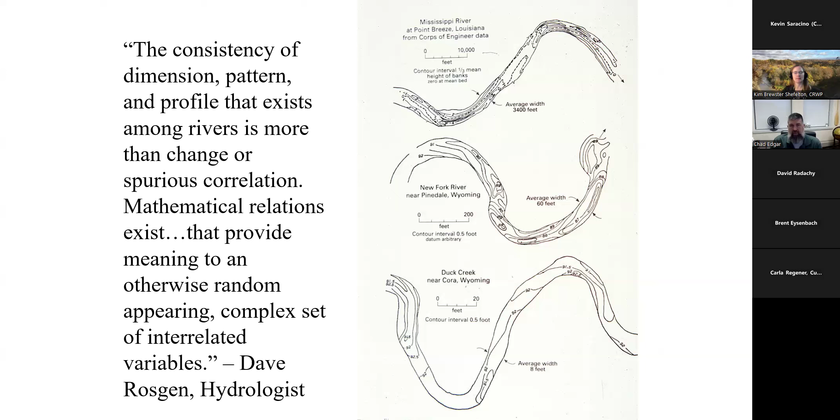So if we look at this image here, you got the Mississippi River down in Louisiana. That's 3,400 feet across the channel. We look at the New Fork River in Wyoming. That's a 60-foot bank full width, and then Duck Creek, an 8-foot width. So different size streams, but what do they all share? What can we make out of this picture? They all have this sinuous pattern to their meander geometry, right?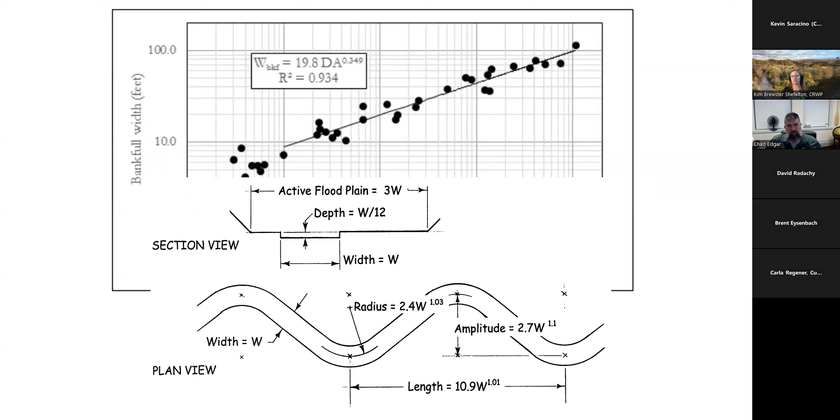So streams will work to maintain a quasi equilibrium, given that all of these things in this lane model stay relatively even. But when we get these changes in a watershed, maybe we straighten the stream out, like Dave's example earlier, and we change the slope, or we're experiencing a higher recurrence interval of the channel forming flow, the Q2. We've got more flow. We don't do a good job of controlling sediment on construction sites, and we increase our sediment load, or we decrease the coarseness of our sediment size with all of the impervious surface. That channel is going to adjust. It's going to go through this deposition and erosion pattern to try and find that new happy equilibrium.

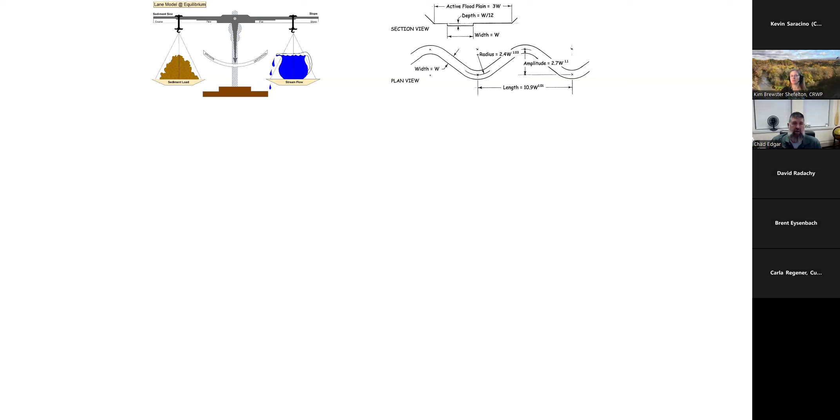So what Dave says is that we're going to see natural adjustments in sinuosity while that channel works to maintain that stable equilibrium. So a riparian setback, in my opinion, is going to allow that channel to go through that evolution process and not threaten any of our improvements or our structures that we've built in there. So putting that all together, knowing what the channel wants to do and how wide it wants to be, and I say want like it's a Disney animal, but it's the physics of it, right? And the lane model, what are we trying to head off?

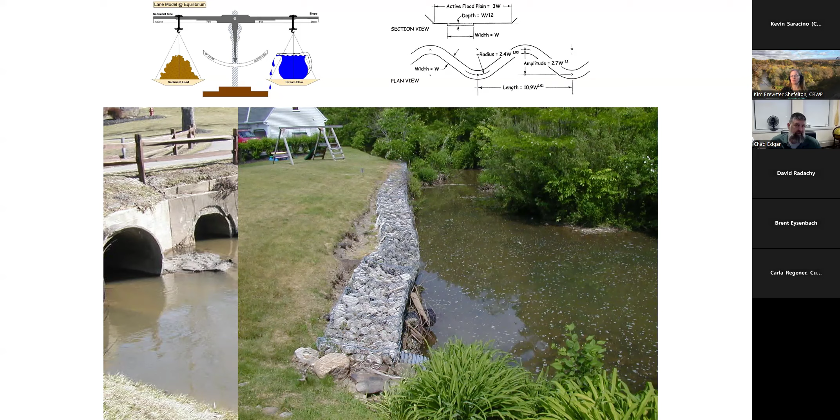Deposition in culverts and having to repair infrastructure. Bank failures in side yards, and then failures of their repair for that failure. We're trying to head off endangered structures when a channel blows out its banks and starts to threaten a structure that should have been set back in that riparian setback. We're trying to head off expensive repairs. That's that same structure there. You can see the repair that they had to undertake, so that was quite costly. But now we're actually working against what the channel is trying to do to heal itself. Okay. And then obviously, we get a lot of sedimentation in streams when we get slope failures.

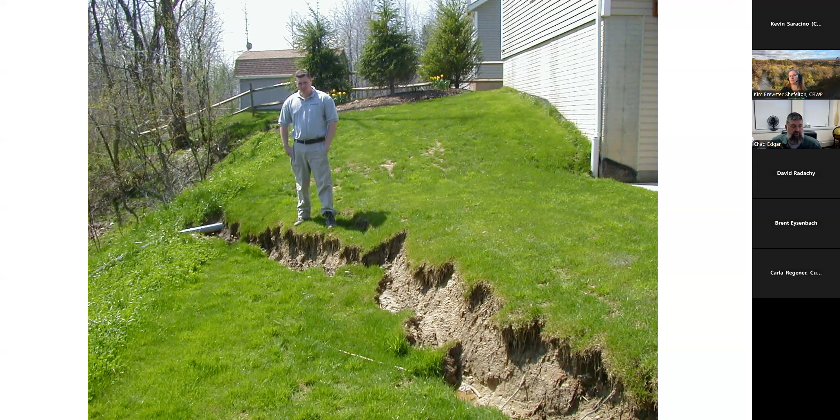So that's the science geek part of it. There is a basis for those widths that is related to physics and not strictly habitat related or temperature related. So understand that those riparian setback distances are tied to natural stream processes. So moving on to looking at a project specifically, we are going to break those three, flooding impacts, bank stability, and filtering, into three separate subjects. And we're going to ignore two at a time just for simplicity's sake.

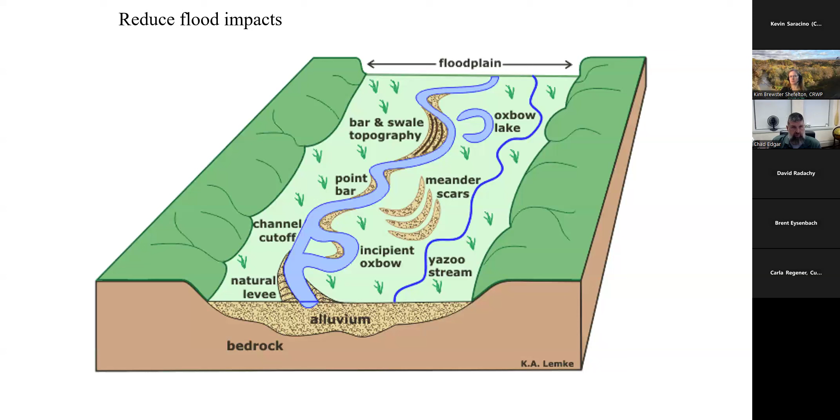If this diagram here from the left side of the image to the right side of the image is our riparian setback, we need to evaluate what that variance request might look like if our shed or pool is in that lighter green area versus what it might be if it's up in that darker green area. So obviously that variance request should be viewed differently if we are proposing things in those two different parts of the landscape. So realize that floodplains can be a regulatory feature like a zone A or a 1% recurrence interval 100-year floodplain. But we also have floodplains that are associated with smaller flows, Q50s, Q25s, Q10s, that are typically a little bit narrower.

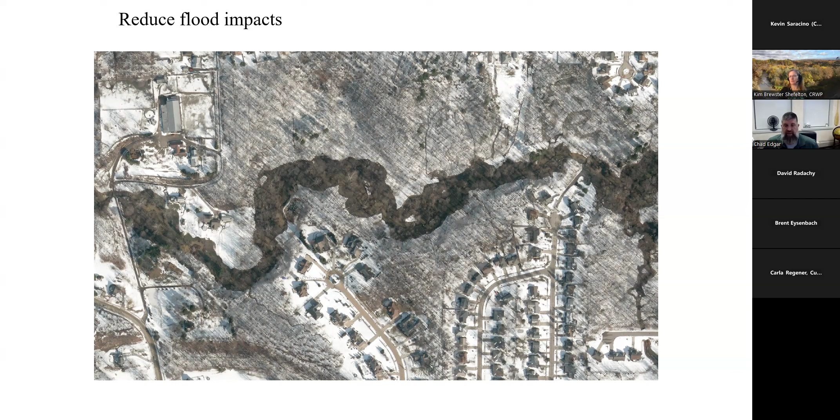I like using this image when I talk to folks about floodplains. This was a flooding event that occurred several years ago, maybe 13 years ago, I don't recall. Significant snow melt with a rainfall event. We had a lot of inundation that melted a lot of the snow on the landscape. So you could see where that flood stage reached, but this isn't a regulatory floodplain that it flooded. We zoom in a little bit. You can see again where that snow melted and where that water level reached during that flood stage. I'm going to throw on topos here real quick.

So just looking specifically at the channel's ability to flood and where it might flood on a property and evaluating that specific request based on that one function of the setback. We look at a picture here. If we don't have really good GIS data, we can make sense of where that floodplain might be based on the aerial photographs or the topos.

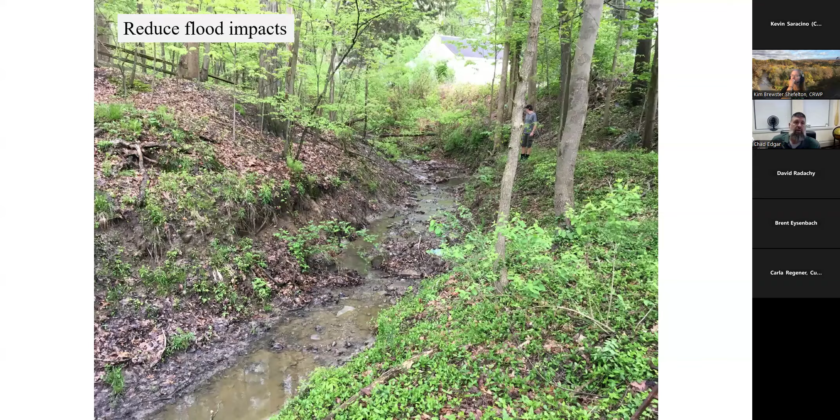Second part of that purpose and intent from the first slide is assisting in stabilizing the banks. And there's two different things that I look at when I'm talking about stabilizing banks. One is vegetation, and in here we have two starkly contrasting types of vegetation. In the foreground is obviously grasses, forbs, which have very shallow roots. They may provide you some erosion control from rilling and from gully formation, but they provide zero function for shear stress and flowing water. In the background of the picture, we have woody vegetation in that riparian setback.

Woody vegetation have nice deep roots, and they will provide good protection from shear stresses on those outside bends and holding those stream banks together. So now we have to make a decision if we are giving comments and we have stream bank that has grass on it. The ability of that vegetation on that stream bank to provide bank stabilization is already impaired. Are you going to base your comments then on that ability or the existing condition?

We've already got an issue here, but is that vegetation going to lessen the ability of the stream to be blown out or increase the ability of that stream to be blown out? So neither one are right or wrong answers. They're just things that we should be considering.

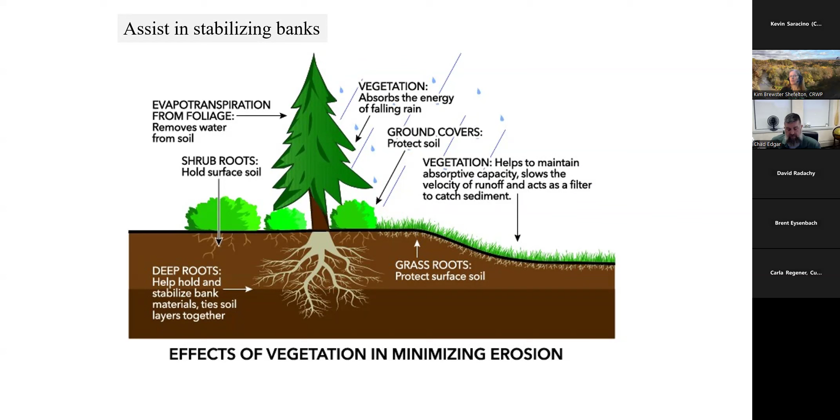And then conversely, obviously if we have woody vegetation, we know we're going to have good protection from shear stress. So the second is, where is that variance request in relation to meander geometry? If we're on the outside of a meander, we should treat that differently than we would on the inside of a meander. Kind of a generalized slide here, just showing some different vegetation types. Obviously, we've got varying forms and degrees of erosion control with different vegetation types. I just kind of covered that, so I'm going to gloss over that slide.